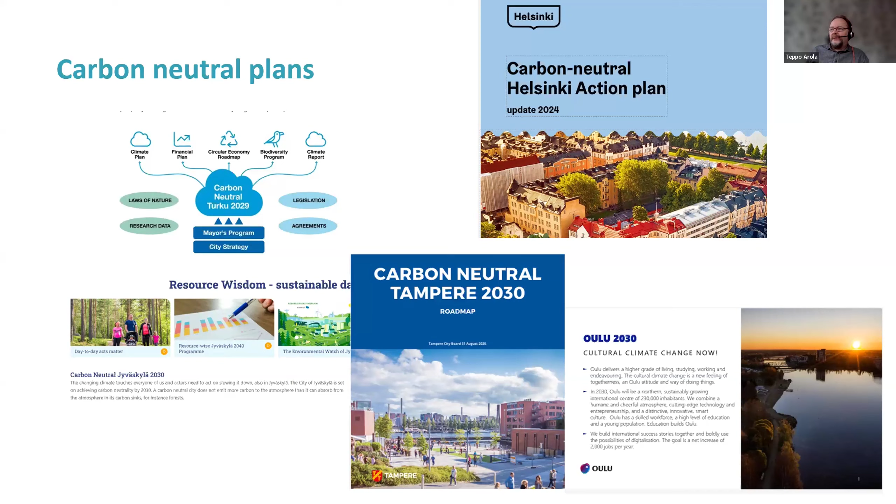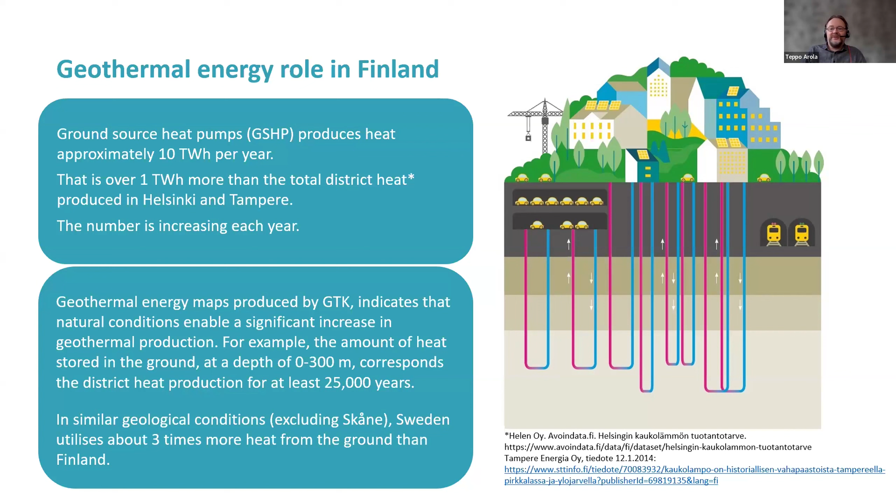And if we come back to the ground, in almost similar geological conditions in our country and in our neighbor Sweden, they are taking 3 times more heat from the ground than we are doing at the moment. So in geothermal, the issues relating to utilization of heat or cool from the ground are technical instead of natural, and it's always easier when it's a technical issue compared to a natural one.

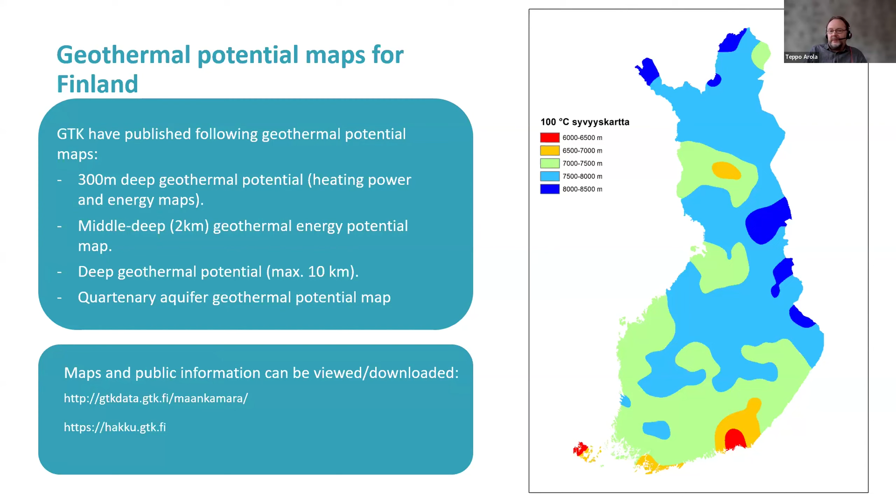So in terms of district heating and cooling, underground energy storages are vital, because we have quite warm summers and huge heating demand in the winter time. So storing heat somewhere is vital, and underground provides great potential.

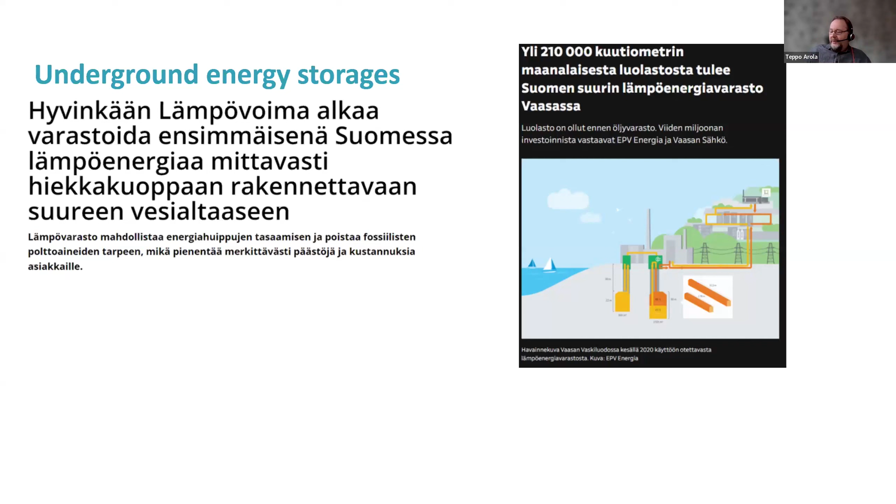Then I have taken these different titles from newspapers. Unfortunately, those are in Finnish, but I'll just tell you the story. This is the title of the first pit storage in Hyvinkää, Finland. This is the title about several cavern storages which were originally made for storing oil on the ground, and now those have been renovated as heat storages. So basically replacing oil with water, and there are several projects going on in that sector.

In Turku, my hometown, there's a market square, and there are hundreds of energy piles under the market square. So they're taking heat from the sun in summer and storing it via energy pile, storing it in clay, and then utilizing it in the winter time.

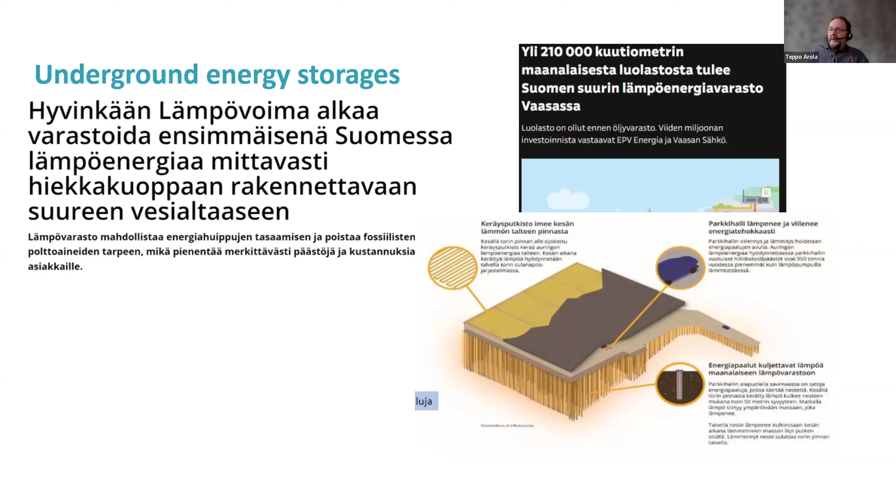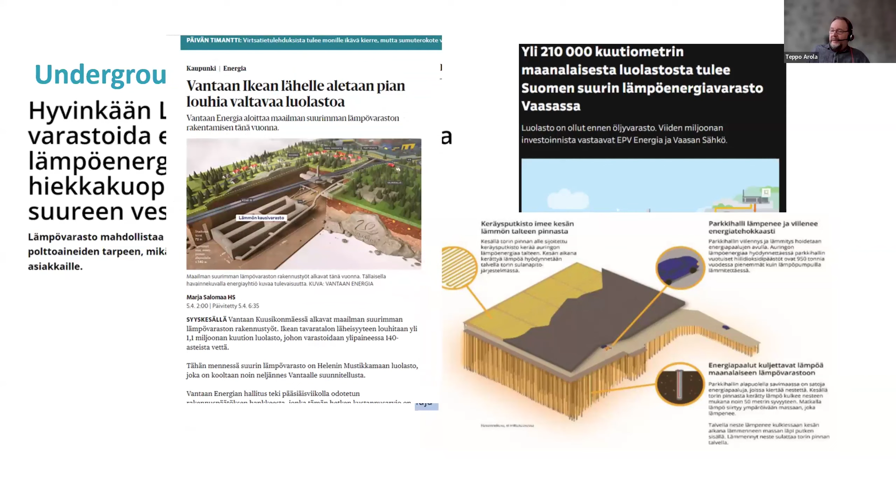Some of you may have heard about this Vantaa Energy. They have started to build the biggest heat storage in the world. They are building a completely new cavern storage in Vantaa. And then just a final example: it's possible to store heat even in 2 kilometer deep wells, which I guess Rami will tell you more about later, so I'm not going to go into detail. These are just to show you the variety of geological conditions, even in our country, that can provide for this area.

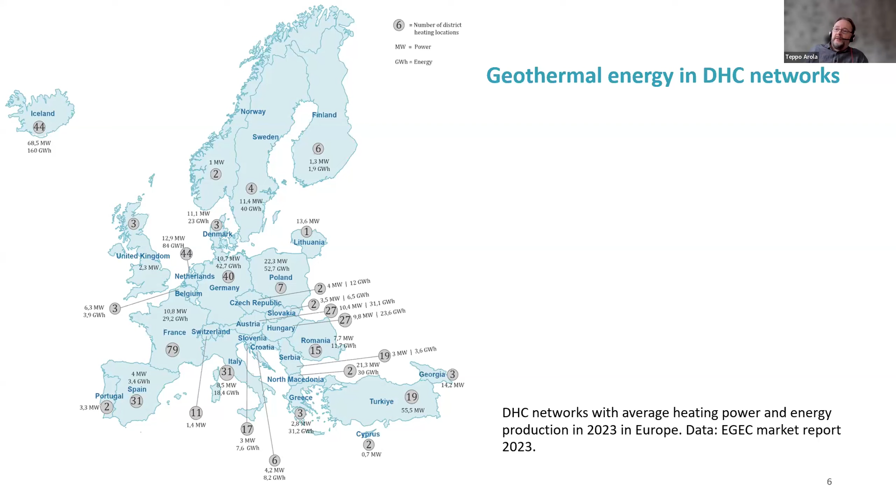However, the number of existing district heating and cooling networks is very large in Nordic countries. So there's a big difference between what the network is and what the number of geothermal sites is. The current district heating sites in Finland are medium deep geothermal wells in bedrock, and also there's one open loop groundwater district cooling system in Pori.

So why is that, and what is needed in future? Well, we know that deeper is more, because there's more heat to provide, but it's still something we may want to study: what would be the optimized geothermal well or well solution for different kinds of district heating and cooling networks?

One of our strategic research questions at the Geological Survey of Finland is how to increase heating power in geothermal systems. Because geothermal systems are very good at providing baseload energy, but not so good at providing heating power for high heat demand. That's maybe one reason why we have so few geothermal district heating and cooling systems at the moment, because we have quite cold ground, and the current district heating system requires quite high heat. So there's a big step from the ground to the current technical solution.

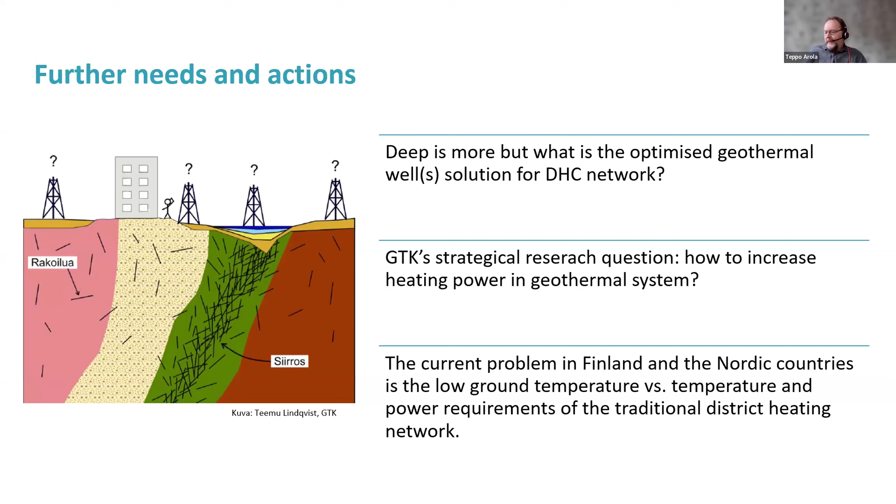Maybe also we haven't really done as good planning as we could, regarding where to drill and where to put our system. So how could we improve them? Of course, the fourth and fifth generation networks allow new possibilities for geothermal, because the step from cold ground to the operating temperature will decrease.

By increasing geothermal energy, we can reduce wood incineration and hence save forest and increase carbon sinks. This kind of point has become more important during these last years.

However, the energy distribution markets are very traditional in Finland, and so it needs a kind of structural and attitude change if we want to make large improvements in that section, and maybe new business models, so that we could provide results which have been shown in the figures, and then build the heating system also in geologically right places.

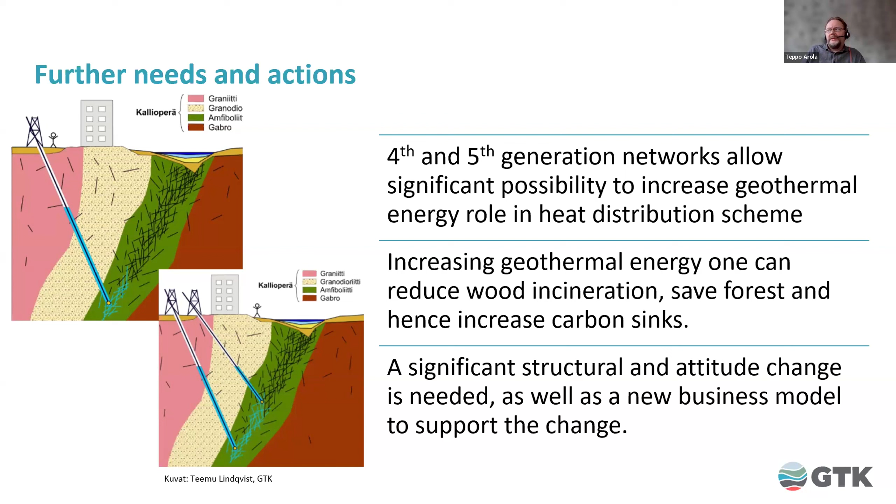Then about risk and funding, as we heard just previously, that was a great database that was represented last. Of course, in geothermal, the ratio of investment cost to operating cost is extremely high, and all the risks are related to the investment phase. In Finland, there's really no kind of reliable funding for geothermal operations. We know that often the risks materialize during the drilling phase, but it's not the right way to invest all the money for drilling, because a drilled well does not provide any energy. You have to build the energy system on it. So I think we would need a kind of new support model for large geothermal projects in this country.

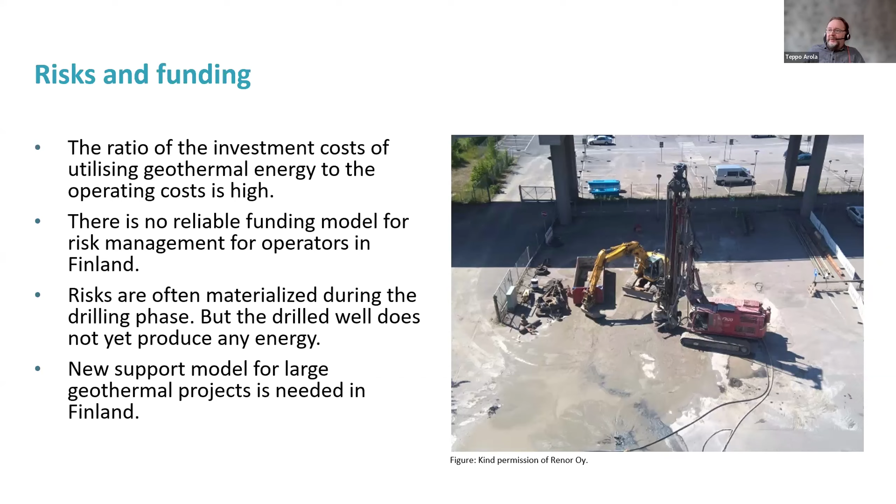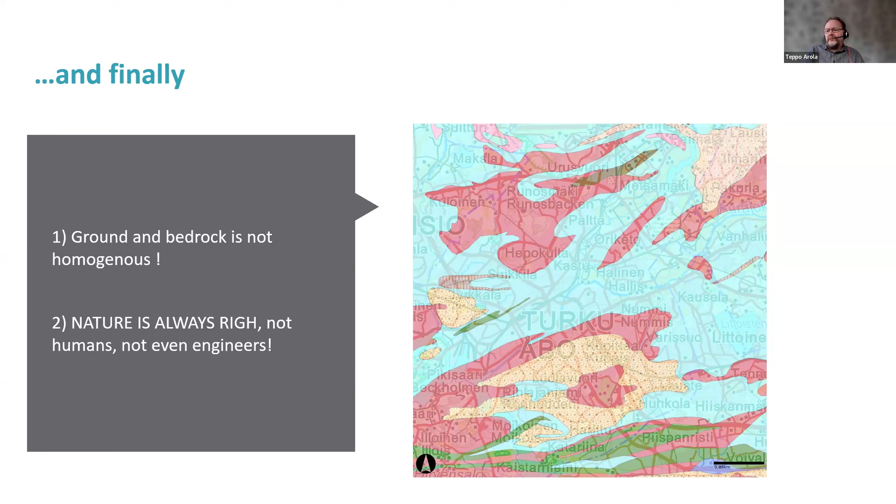And finally, I'll always end my presentation about the story of non-homogeneous ground and bedrock. So these systems cannot be copied from one place to another. You have to know what is underground. And the nature is always right, not us as humans, and not even engineers. This is a bit of a joke, but anyway, it's something which nature couldn't care less of our hopes or wishes if they are not based on science. So we cannot change nature. We can read it, and that's why we can provide better geothermal projects and solutions. So that's all what I had. Thank you for your time, and open for questions.

Thank you, Teppo, for this really interesting presentation and overview of geothermal district heating and cooling in Finland. I think you touched on several topics that are also raised by the IEA report. There were 2-3 maps showing the temperature reached at different depths, and indeed the issue is that if we can reach a certain depth, basically geothermal is everywhere. So I think it's a matter of innovation, but also an issue of accessing the right funding schemes to untap this potential. A lot still needs to be done, definitely. Having a geothermal scheme at the European level, like funding for a risk mitigation scheme, could I think help Finland in tapping the geothermal potential there. But yes, definitely, I'm sure there will be questions on this, so we will wait after the presentation from other speakers. Thank you, Teppo, and I will pass the floor to Jussi.

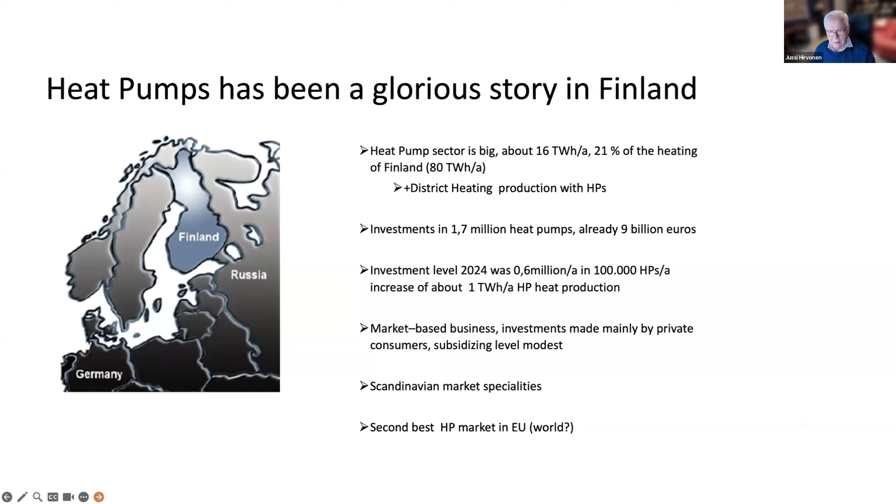So if you look at Finnish heating and the market shares there, we see that Finland is a district heating country. We have 45% district heating. We have quite a lot of electricity. We have some wood. We have quite a small part of fossil fuels still. And this orange is our heat pumps. And today, this electricity for heat pumps also goes to production. So we have about 21% of Finnish heating production with heat pumps directly.

And also part of the district heating is nowadays with heat pumps. So maybe about 10% of the district heating production is with heat pumps. So heat pumps are producing 1/4 of our heating production in Finland. So it is quite a good achievement.

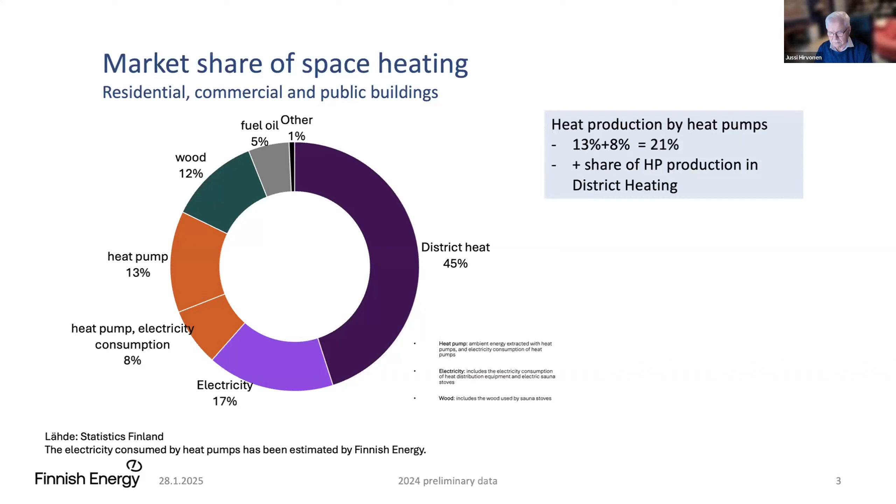Why? There is a systemic change in our energy system, and all these lines are practically raining on heat pumps. We have to stop burning fossil fuels and at least minimize burning of biomass more and more in future. Electric energy production is going from centralized systems to decentralized and hybrid systems. Of course, we have to save energy, be more efficient, and use all waste heat and renewable local heat wherever possible. Cooling is an increasing part of the business. It is very good for heat pumps.

Heating and the whole society is rapidly electrifying. And we see that traditional district heating is no longer growing in Finland. It is even decreasing today and will decrease. Electricity production is going towards CO2-free production, especially towards wind. We have quite a good nuclear power base there, 30-40%, but it is not increasing in the next 10 years. This means that consumption flexibility, all kinds of power management and energy storage systems are of increasing importance.

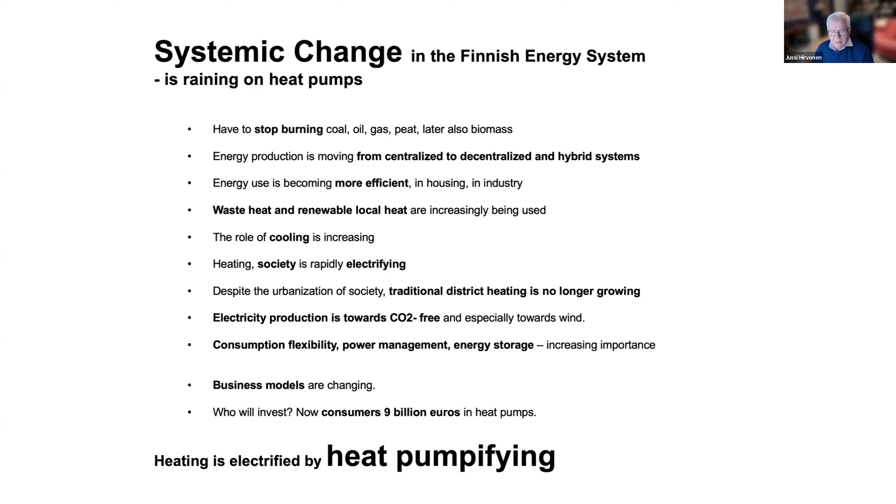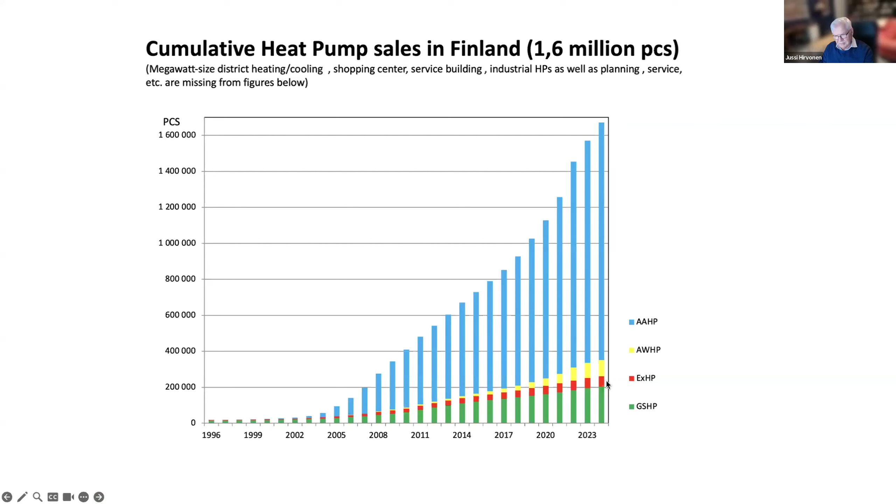To those figures. So this is 1.6 million at the end of last year. So now it starts to be 1.7. We see that most of the heat pumps are air-to-air heat pumps in Finland, but we have also 200,000 ground source heat pumps and an increasing amount of air-to-water heat pumps and exhaust heat pumps also.

Same in investments. So here the total investment is about 9 billion euros, and it is mostly made by end customers with their own money without subsidies. And the reason is clear, it has to be profitable in Finland.

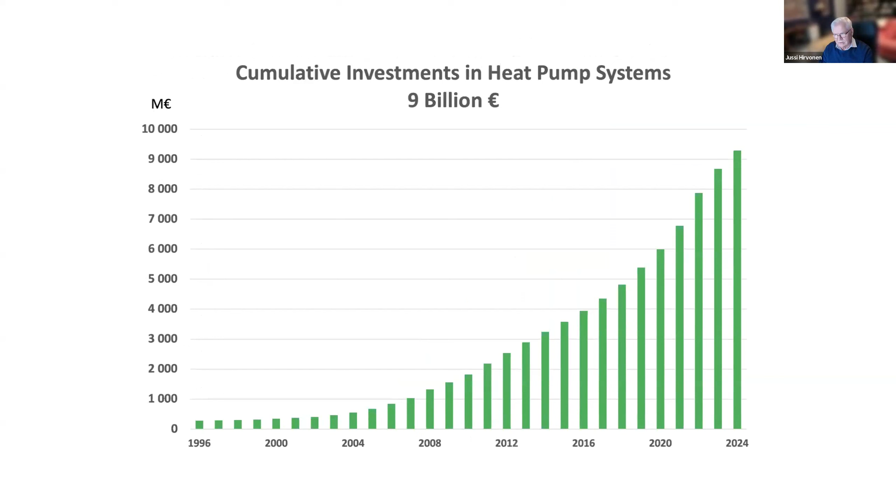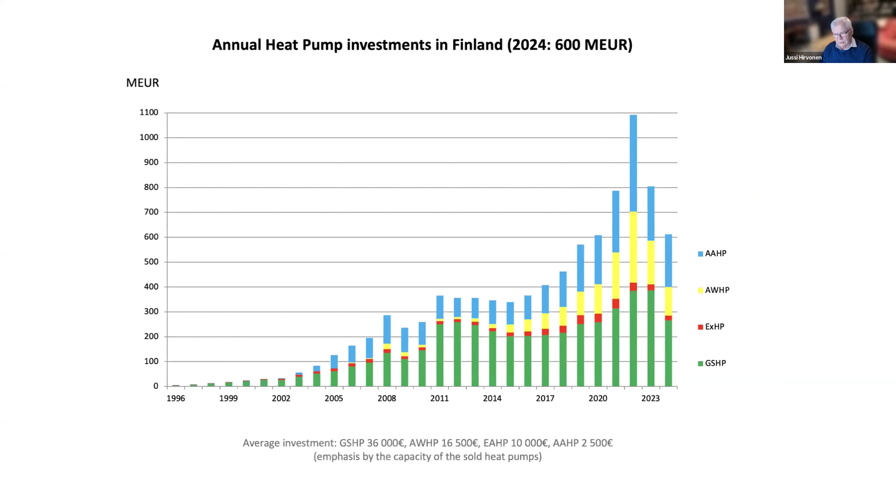Here are those annual sales. It was 600 million euros last year. We had this top year, when we were over 1 billion in one year. The reasons why it is going down I don't go into in this presentation, but anyway, we have reached the bottom again, and now those figures are increasing again, and we are on the curve after these 2 bad years. So we have a glorious future with heat pumps.

There is potential in oil burners. We have 100,000 oil burners in Finland. We have direct electricity quite a lot in Finland still in small houses and our almost 500,000 free-time houses. We have 30,000 district heated apartment houses with exhaust ventilation, and it is huge potential for heat pumps, even to use only exhaust heat pumps or combined exhaust and ground source heat pumps. About 5 terawatt-hours there.

Commercial service buildings, shopping centers, office houses, nowadays mostly new ones are going to ground source heat pumps because there is also this cooling demand, and we can use the same equipment for heating and cooling, and this drilling field as a storage.

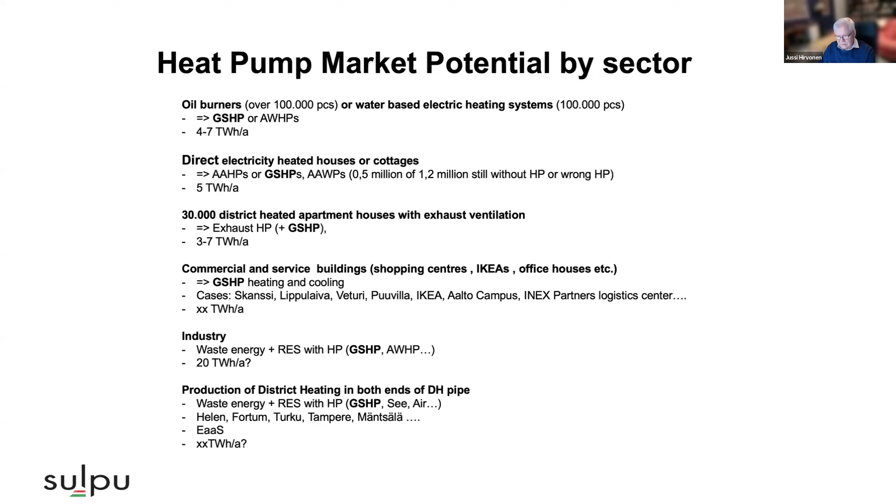Industry, it is coming. We don't know actually how big the potential is. Anyway, heat pumps are coming there, because nowadays technically we find heat pumps which can produce 100, 120 degrees, 140 degrees, even 200 degrees steam. So that area is growing rapidly. And also, of course, this production of district heating at both ends of the district heating pipe. All waste energy naturally in centralized systems, and we find also local energies if we find the right business model for that.

Here are some specialties of the heat pump market in Scandinavia. Of course, we are lucky that we have no gas grid here. We need not compete with gas. It has helped the business all the time. We have cheap and clean electricity and a very strong grid. That is what the whole of Europe is missing. We have a lot of electric heating. We are replacing electric heating with heat pumps. So we are saving electricity with our heat pumps. That is a specialty in Scandinavia.

We are replacing also district heating with heat pumps. That is also a Scandinavian specialty. And of course, we have quite a big stock already in our country and in Scandinavia, about 5 million heat pumps, which were installed 10, 20 years ago. So replacing heat pumps with heat pumps is also one of our main businesses nowadays.

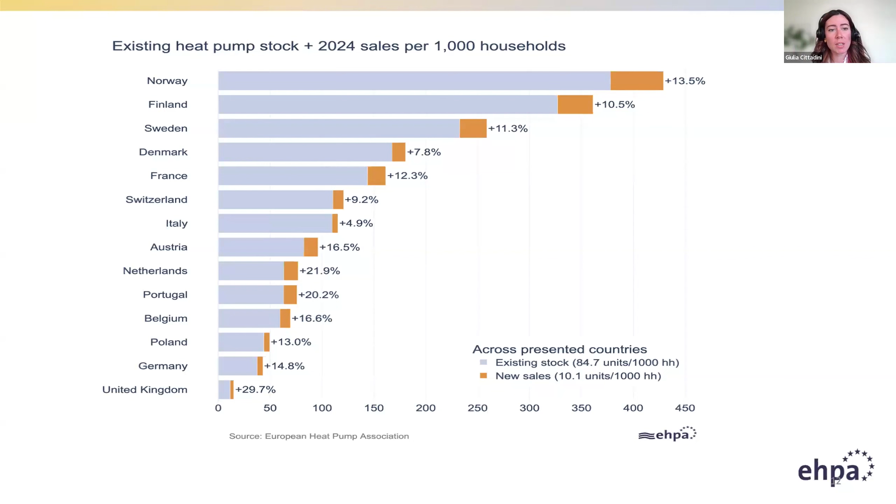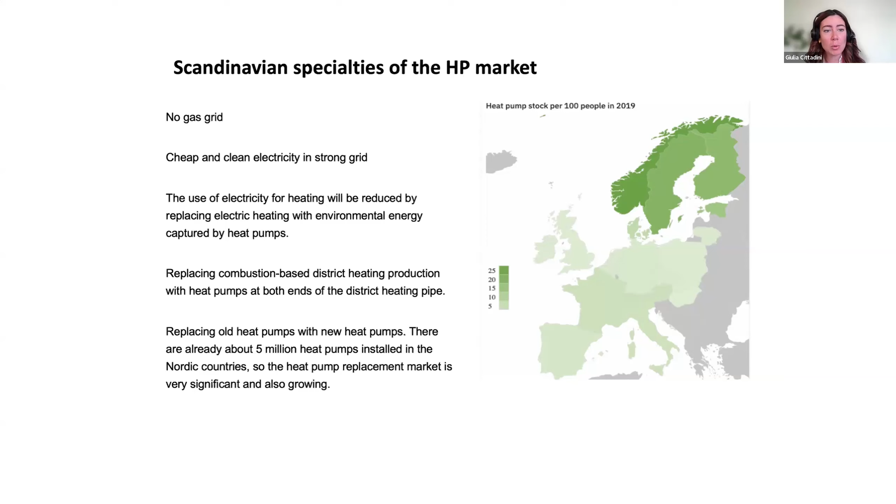Thank you, Jussi, for this interesting overview of the heat pumps market in Finland. It's quite impressive to see that figure of 9 billion euros of investment that is entirely supported by end customers. I think it gives an idea of the appreciation of this technology by customers, who every year are relying more on this technology. So I think it's important that you showed us this figure.

And also I think the open question that you pointed out was interesting, about the capacity of heat pumps to meet the requirements, the needs for industrial processes. I think this indeed is still an open question for some of the technologies that we are presenting today, and something that in the coming years we will need to address. So thank you, Jussi, for this presentation. I'm sure there will be questions after this.

But I will move forward with our next speaker, Hannes. Oh, this is difficult. Tuohiniitty. Sorry, I hope I pronounce it decently at least. He's sector manager at the Bioenergy Association of Finland, and he's going to present us an overview of bioenergy in the country. So Hannes, the floor is yours. Thank you for inviting me here. I'm coming from the Finnish Bioenergy Association, and I'm telling something about the role of bioenergy in heating in Finland.

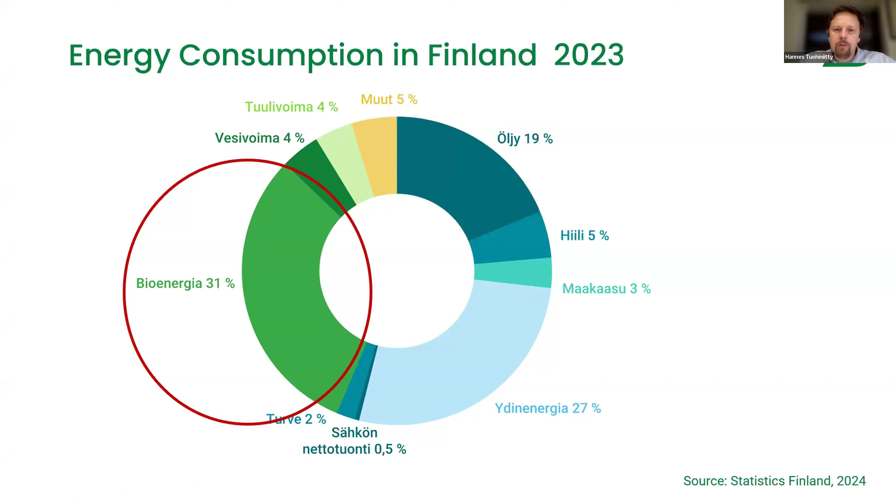Here we can see the energy consumption in Finland, and bioenergy in total, including all the sectors, accounts for about 1/3 of that. This is work which started already in the 1970s, mainly from the bigger installations, and all the time we have had a significant share of our heating in individual houses coming from wood. Finnish wood fuels have mainly been used in the forest sector, which is this industry CHP. There are also other industry sectors, and that's always been the biggest part.

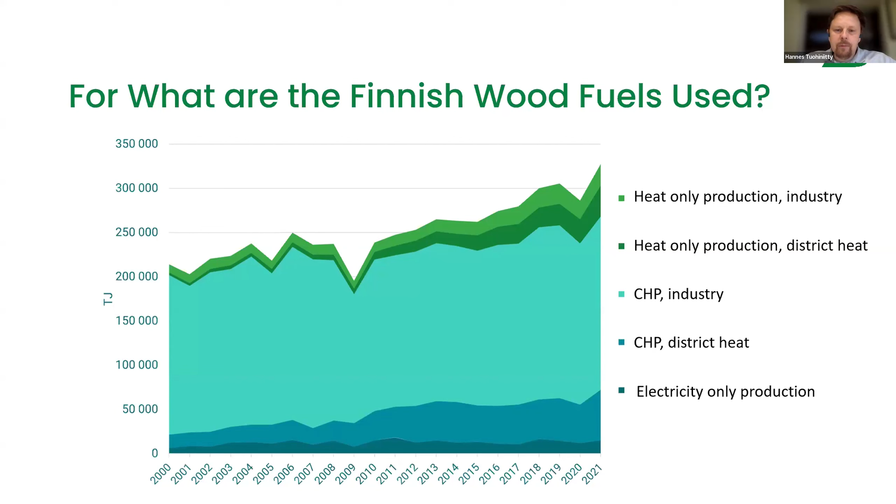But in recent years, starting from about the late 90s, CHP for district heat has increased significantly, and also heat-only plants in district heating, and use for individual buildings has increased a lot. And electricity-only production is a very small, minor use of biofuels in Finland.

So some words about district heating, because it's a great platform for bioenergy, although it's also a kind of multi-solution platform. We have about 500 district heating networks in Finland, ranging from small networks of 500 kilowatts all the way up to 2,700 megawatt heating networks in peak output. And we also have a lot of production capacity for those very cold days.

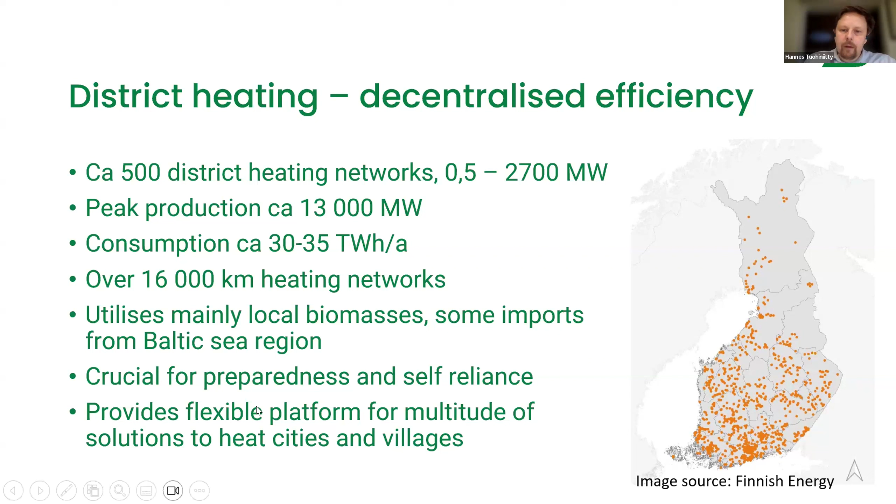And in Finland, biomass is also very much seen as one big part of preparedness and self-reliance, to be sure that nothing is geopolitically interfering with our society. And as explained, it's a good platform for a multitude of solutions, which I come to a bit later.

On the district heating fuels, the division of fuels used, you can see here on the left side, and forest fuel wood is about 1/3, and additionally other biofuels and industrial wood residues is about 23%. So altogether more than 50% comes from forest in one way or another. And then we have heat recovery, which is also partly flue gas recovery from

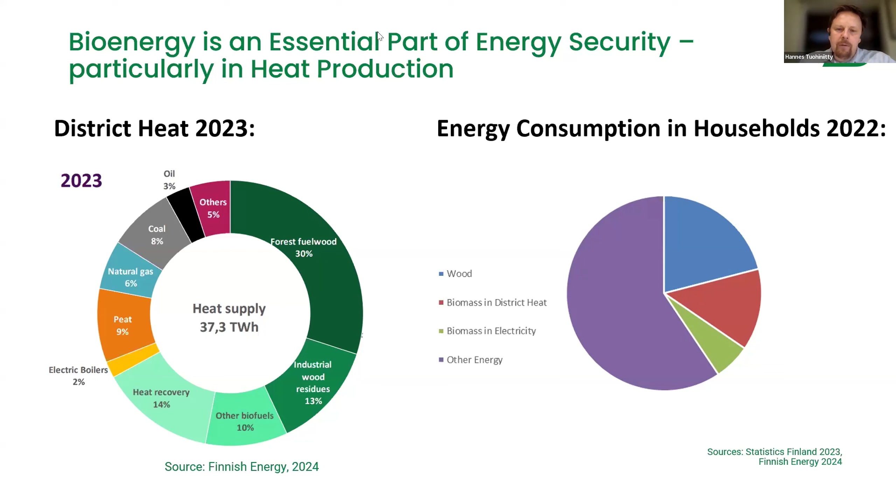forest fuels. And on the right side, you will see the energy consumption in households, and there additionally is direct wood use, like residential wood logs, pellets, wood chips, and this really shows how big an impact there is on energy production and energy consumption in Finland coming from forests altogether.

One example of how bioenergy in district heating is also nice, having different synergies, is presented here. The main application is the municipal district heating and CHP plants, like the one in Tampere where I live, a very new one, also producing electricity.

And then we have different kinds of solutions, quite new ones, like combining the production of biochar and synthetic gas production. So you can produce carbon removals and also produce gas that can be further utilized in different applications. And also individual industrial process heat production is possible with bioenergy. It can be for the industries to use

steam, and one nice example, a very new one actually, is in Joensuu, where the company has just invested in torrefied biomass production, which is built adjacent to a district heating plant, and they utilize energy flows in both ways. Excess heat from the torrefied biomass production is utilized in the district heating network, and further that torrefied biomass can be used in other industries. So it's a kind of refinery for biomass.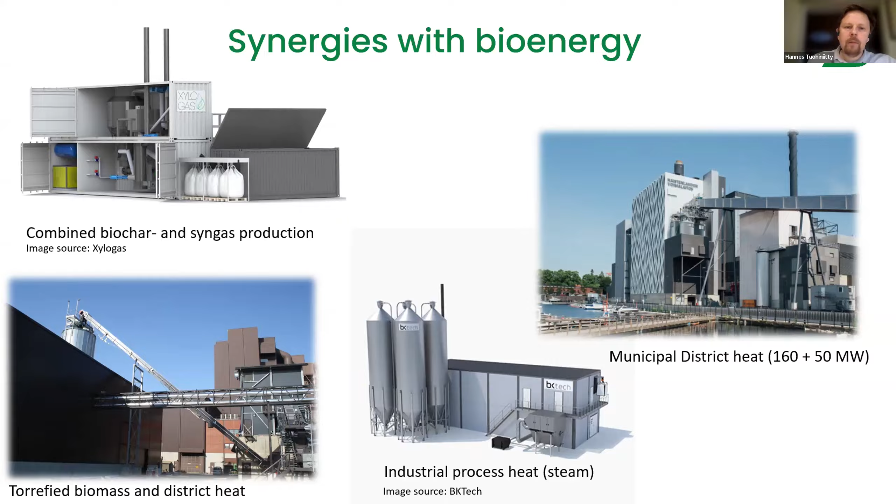And just to end with some notes about the future role of bioenergy in district heating. There is constant work in the ministries on the energy and climate plan, and this is one example from 2 years ago, showing the primary energy in different base scenarios. And here it's quite easy to see that the role of wood fuels and black liquor, the green bars here, is not diminishing in the coming decades, although the total energy consumption is decreasing.

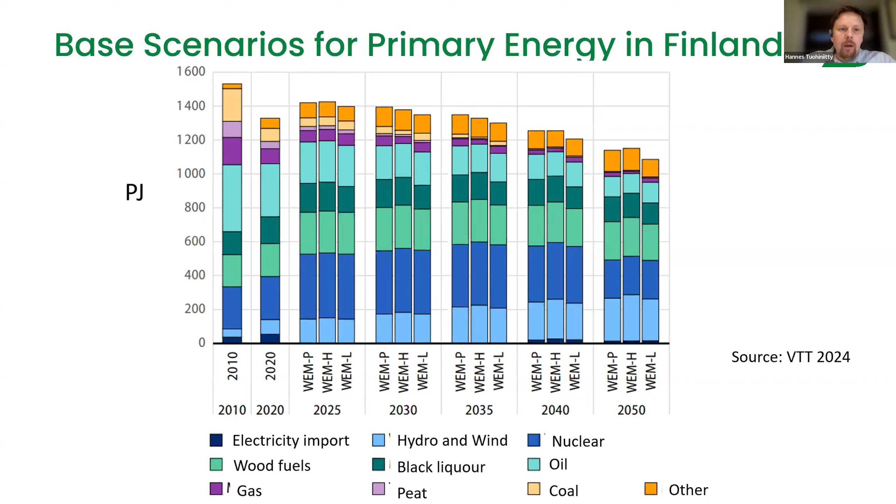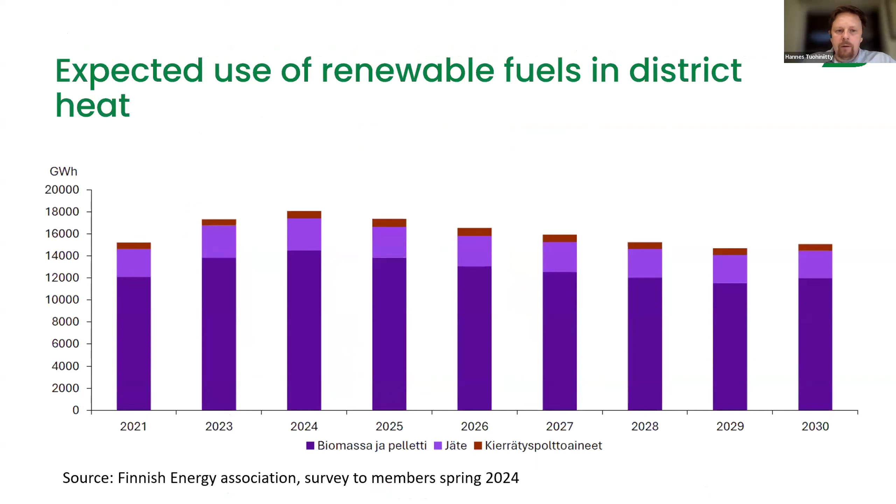Electric boilers, because we have a lot of, so to say, excess electricity in the network because of the high amount of wind energy in Finland. So the electricity price in certain hours is very low, even negative, and this is very lucrative for energy companies to invest in electric boilers and utilize this for district heating. And waste heat from data centers and upcoming hydrogen production is also something that we expect to play a major role in the future, early 2030s at least.

And the last point which I would like to raise is carbon capture, utilization and storage, which is a great opportunity for Finland. We have a lot of large point sources of biogenic CO2, and this is totally a new market, new opportunities for companies, either to utilize it for synthetic fuels or distribute it to Norway, Denmark, or other countries for permanent storage, creating carbon removals, which also has a different market.

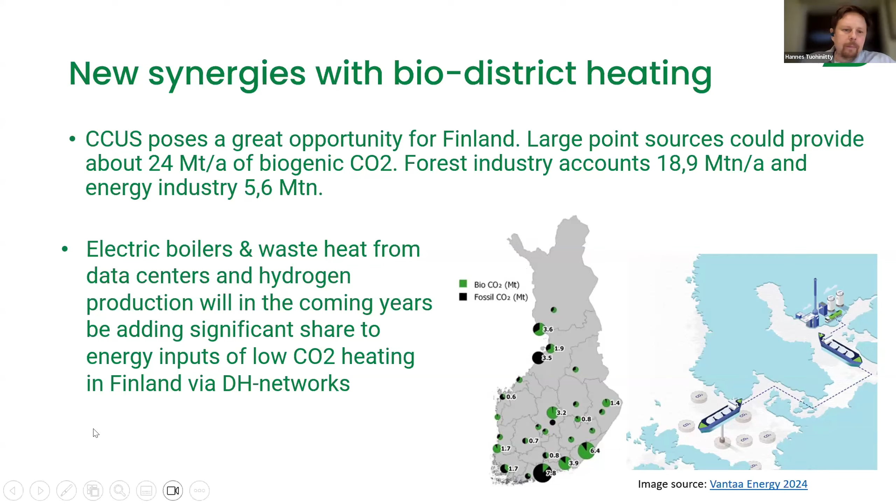Thank you, Hannes. Thank you for this presentation overview of bioenergy in Finland. I think it was quite impressive to see some of the figures and numbers about the relevance of this source in the country. And I think it was also relevant to see the different synergies and applications with other plants. I think it's a key issue also for other technologies here to understand what synergies can be developed, how to increase the efficiency in this sense.

And I also very much liked the end of your presentation on the opportunities of this new market for carbon capture and also storage. I think it would be super interesting to see what the developments are going to be here. And I'm sure there will be questions on this as well.

But I will move forward with the last speaker today. I'm pleased to introduce you to Rami Niemi. This was easier. He's Chief Technology Officer and founder at QHeat, and he's going to present the Coaxial Reversible Medium Deep Geothermal Heat Well technology. And Rami, the floor is yours.

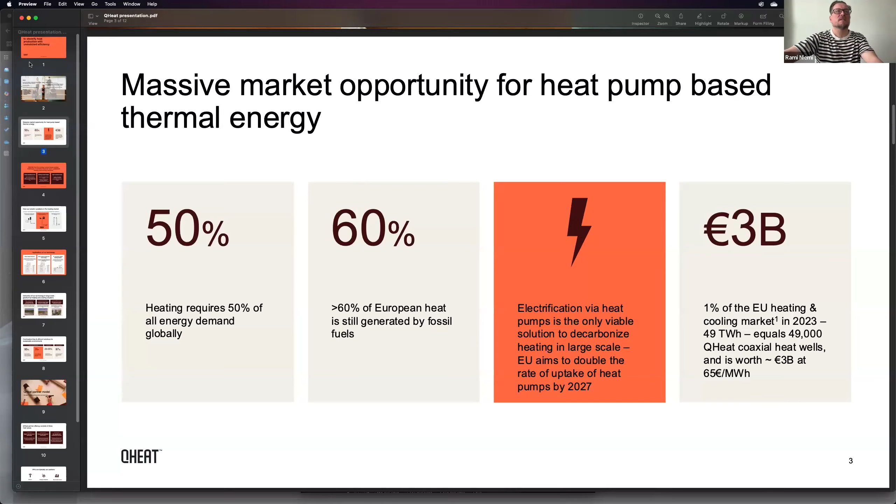Thank you. How is it looking? Are you seeing my screen now? Yes, perfect. Now it's perfect. Okay, thank you for the opportunity. Okay, now it starts to play again. Way too fast. So, thank you for the opportunity.

Teppo and Jussi perhaps captured much of the things that I am really interested in at the moment. I'm glad that I don't need to explain the necessity of heat pumps in the electrification of heat production. So my point is to explain a specific kind of new technology, or new-ish. It's not totally new anymore, but we still call ourselves a startup company, maybe trying to move into a scale-up company regime.

Our company name is QHeat. We are concentrating on the electrification of heating. The company is not that new anymore. It was founded in 2018, so it makes us a 6-year-old company already. What we think we are at the moment is not a drilling company, but a technology company delivering several aspects in the geothermal field: mainly feasibility studies, energy calculation, concept designs, also delivering critical well components and advisory.

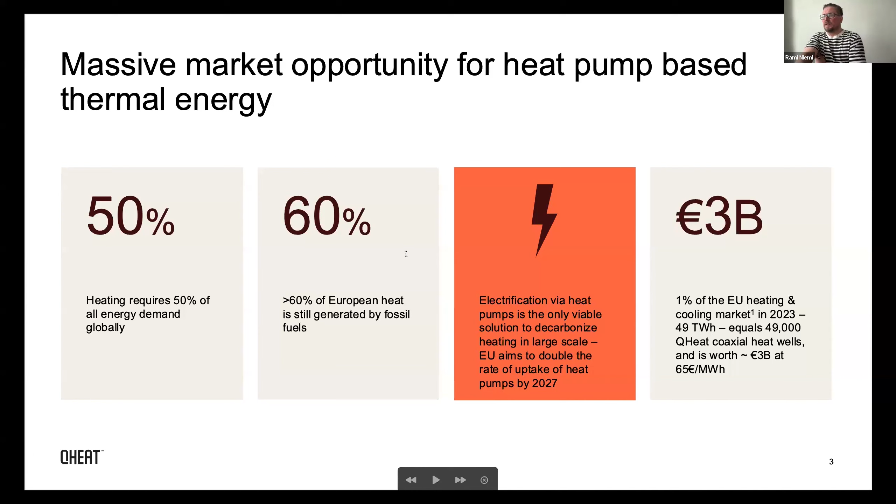But before we go into the technology, I would like to emphasize how huge the market opportunity is. In Finland alone it's huge, but taking the whole of Europe into calculation, the electrification and the potential for heat pumps is huge. Heating requires 50% of all energy demand globally, and this is an astonishing number. 60% of European heat is still made by fossil fuels. Equally astounding. The electrification, in our view, will be the most scalable option in the future. With the numbers, you can calculate easily, the consequences will be big. Taking even 1% of the EU heating market is a huge number alone.

The energy market faces multiple challenges in transitioning toward more sustainable heating and cooling solutions: rising operational costs, emission standards getting tighter, so therefore we need to do a lot. Meeting the climate goals is clearly a driver here. Funding is still one of the big challenges, as Jussi also pointed out. Who will be the funder in all these projects will be a critical question. But to the technology.

In Finland, as Jussi explained, there is a huge booming, quite mature market of these 300-meter deep ground source heat pump systems, delivering some 10 terawatt hours of heat annually. This booming market made district heating companies try to tackle the same problem and find a solution for really deep geothermal energy direct use in Finland. Most notably, ST1 Deep Heat drilled two 6-kilometer deep wells here in the Helsinki area, in Espoo, Otaniemi. The project was a success in terms of drilling technology, but the end result in heat extraction was somewhat poor.

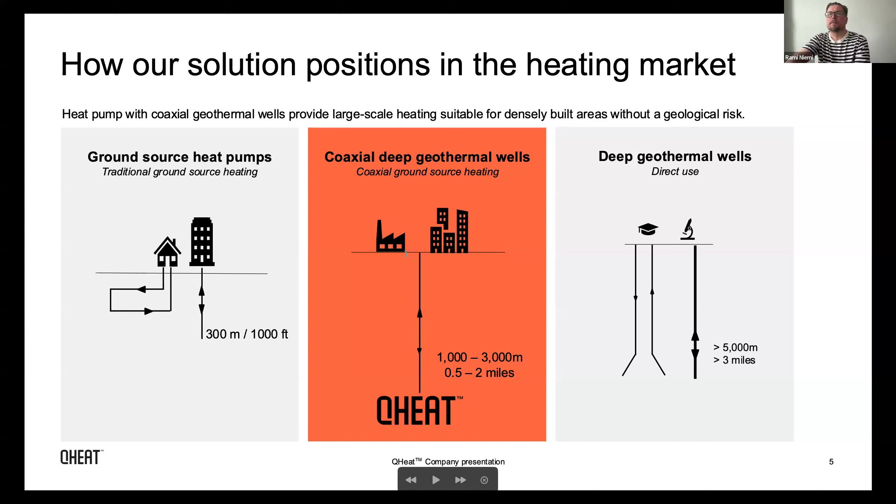But the main obstacle is how do you get deep without exploding the drilling costs, and that is one of the evolutions that QHeat have been forced to make. So what do we provide? The application of our technology.

The most simple form of the technology is to drill a hole deeper than 1 kilometer. The trick is not just to drill a deep hole - the real problem is how to extract the heat from a deep well with limited capacity of working fluid, and making the most out of a limited diameter hole. The diameter is limited since the cost grows fast when you try to drill a larger diameter hole.

But making the most out of the limited diameter hole happens with the use of coaxial heat extraction design. This is basically needed - you cannot avoid having this coaxial design when you try to go deeper than 1 kilometer. What was a little bit surprising is that nobody had thought this through before QHeat. What we figured out at QHeat was that by changing the direction of this coaxial setup, we can make the deep well into a heat storage.

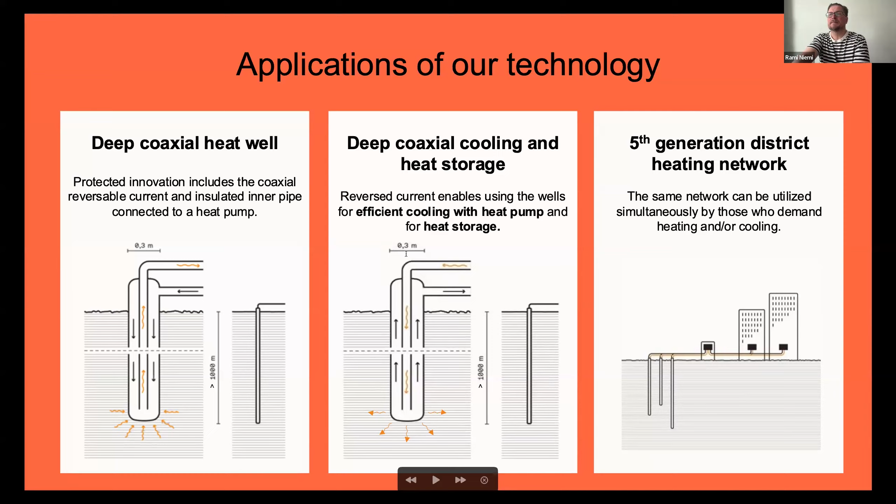About the projects and the types of systems that we have done so far - the first one being the large warehouse for medical purposes, basically trucks coming, a logistics center. This is from the Helsinki area, Koskelo. This was the first one that we produced, but already the second big project was this Lounavoima project in Salo.

In Salo, there's a huge waste burning facility producing almost all the heat that the city needs. This means that in summertime, when you have to burn the waste basically every day in order to not pile up the wastes, the plant produces heat that the city cannot use. So therefore it makes perfect sense to store the heat into the ground.

And we have just finished last week the big project of 6 wells down to 2 kilometers. And for next winter, it will be ready and providing, in the middle of the winter, stored heat from the summer.

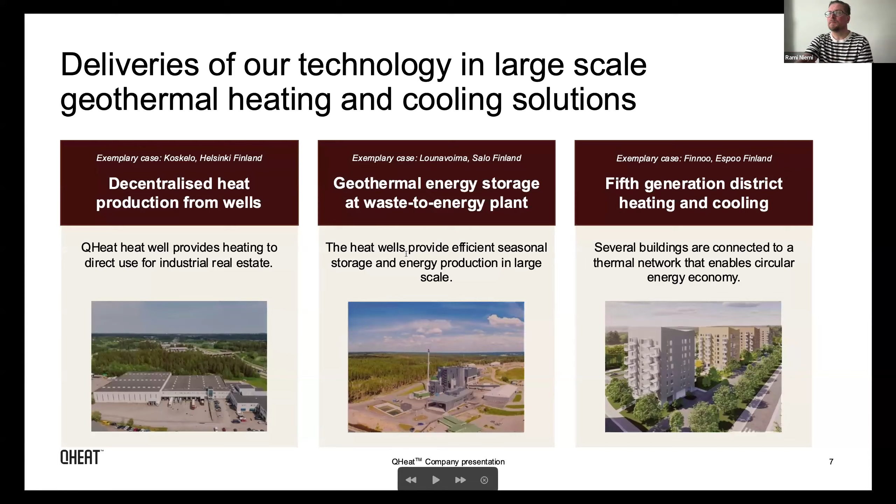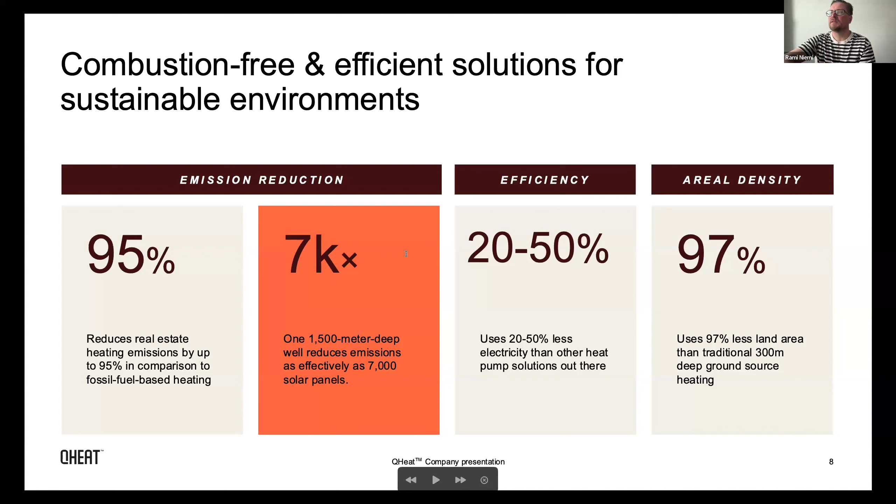What we are, our basic offering is to reduce the real estate emissions by 95%. Of course, it depends where you compare it, but I think our main offering is that the areal density compared to the shallow ground source heating system is even 97% better.

And to the end, I would like to describe a little bit how we see ourselves in the future. Since we started as a drilling company, since we didn't find a drilling company for our business in Finland, we needed to start as a drilling company, but that is not how we are going to go forward. Our future will be through a partner network for the energy companies and for the drilling companies. So what we offer is our technology, our licensed technology, our know-how, and also equipment for the wells. And what we are looking for is drilling companies, energy companies, and real estate owners. Those are the main 3 customers or partners in the future for us.

This was all that I was planning on introducing at this point.

Thank you, Rami. I think it's great. It was super interesting to see how just reversing the current enables this other application. I think it's great, it was very interesting that you shared it with us. And maybe we can start with the Q&A session already. I can ask you to stay, and I see on the chat this question that it's for you.